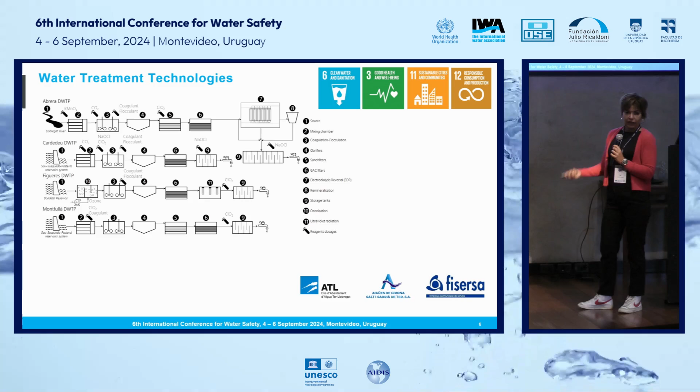So the aim of drinking water treatment plants is to provide this water. This is the conventional treatment train that the drinking water facilities we work with have. The most conventional treatment is a pre-oxidation with ozone or with potassium permanganate that aims to break the organic matter, remove inorganic compounds or pathogens, and improve the treatment efficiency in the subsequent technologies used.

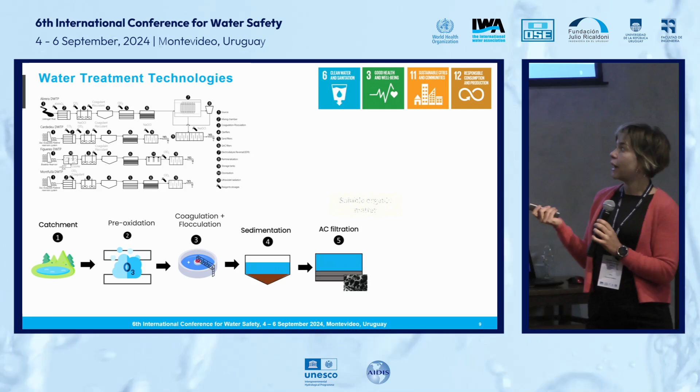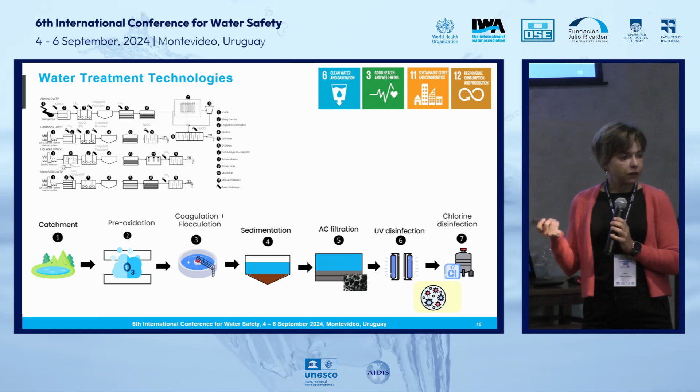Then we usually have a coagulation flocculation plus sedimentation unit that aims to remove colloidal organic matter. This is followed by an activated carbon filtration unit that removes soluble organic matter, and this is followed by final disinfection, which can be with or without ultraviolet radiation.

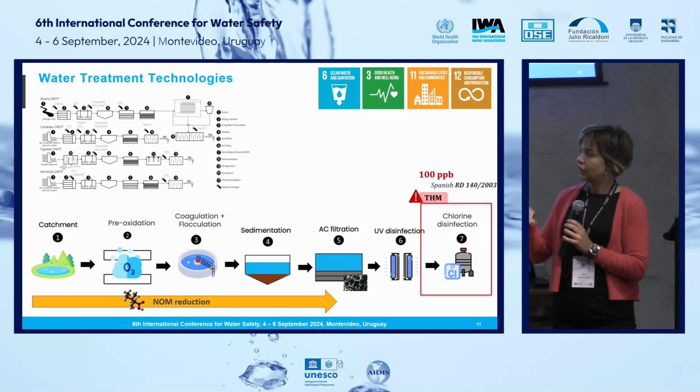But chlorine is mandatory in Spain. And with all this train, the natural organic matter is removed, leading to the formation of trihalomethanes, which are disinfection byproducts legislated under the 100 ppb limit.

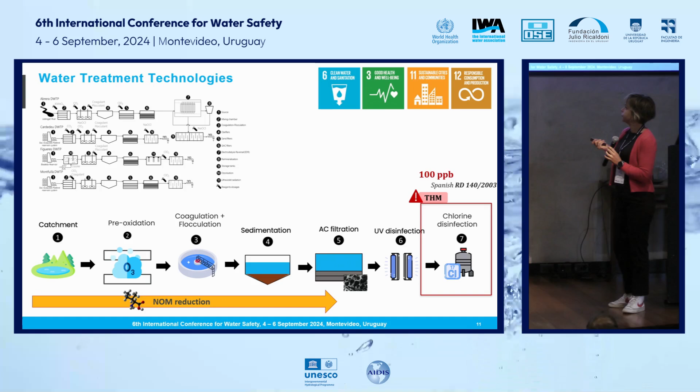So in this context, the objective of the work I'm presenting now is to characterize well the composition of dissolved organic matter and understand its reactivity towards disinfection, to predict the formation of disinfection byproducts in the distribution systems. To do so, we are using size exclusion chromatography coupled with

diode array and organic carbon detectors. But this is a complex methodology, so the outcomes of this technology for analyzing organic matter, we will try to simplify with more bulk analysis methods that we can use online with rapid analysis using visible UV and fluorescence detectors. And all of this, we will try to digitalize to apply in the drinking water facilities.

So this part I'm presenting now is part of the PhD thesis of Meritxell Valentí Quiroga. She is almost ready to defend the PhD this September. And what she's done is develop a method where she can characterize the organic matter based on the fractions according

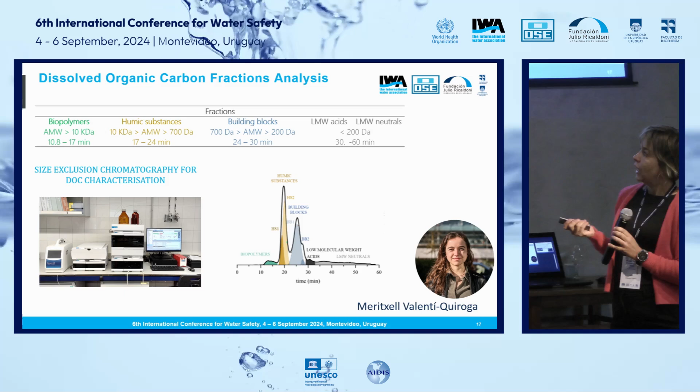to the molecular weight. Using size exclusion chromatography, we can divide the natural organic matter into biopolymers, humic substances, building blocks, and low molecular acids and neutral compounds, which can also be subdivided into fractions. And to do so, we are using two chromatographic columns in series.

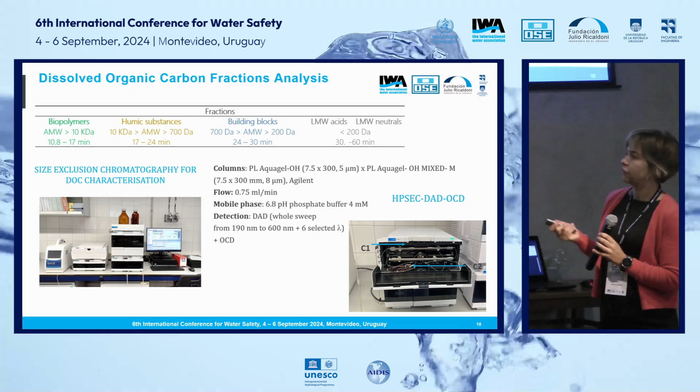And this is the separation method we are using. We have more details if you are interested in the analytical technology. And this work is carried out with three of the facilities I introduced before.

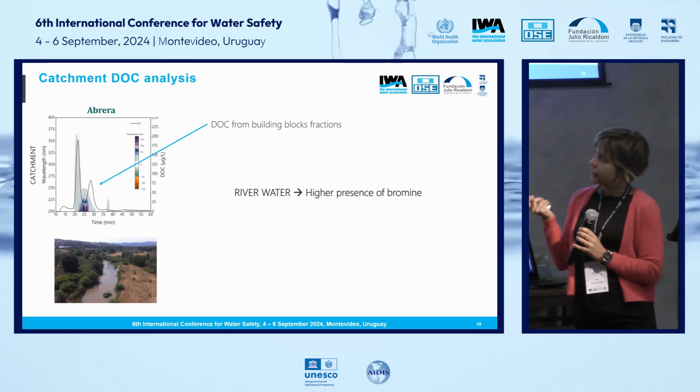Here you see, for instance, in the chromatographic separation, that there is a lot of building blocks in that fraction, in comparison with Cardedeu and Montfullà, which is in Girona, where the distribution of fractions is quite different.

What we did is analyze along the water treatment in the facility. Here you can see from the catchment to coagulation, flocculation, adsorption, and the different technologies applied, how the different fractions are reduced. What we can see, for instance, is that coagulation and flocculation have a lot of reduction in

reservoir sources, while in river sources there is a different behavior, so adsorption produces a higher reduction of other fractions. If we compare the influent to the effluent, we see how this chromatographic separation changes. Here you can see only the chromatograms, but this is something that needs to be observed in detail. So here I only put the influent and effluent for comparison, but here you see the numbers.

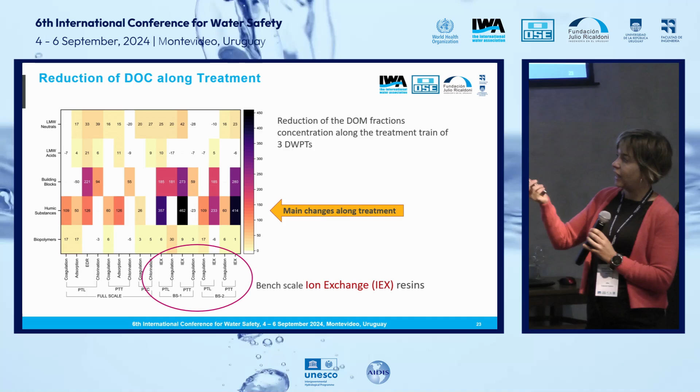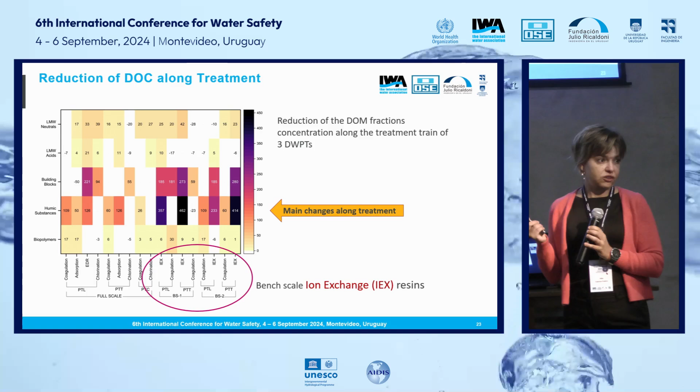made using ion exchange resins. So we compared these reductions in the dissolved organic carbon with the same water's reduction of the formation potentials of the trihalomethanes. To analyze the formation potentials, we did some chlorination with 3 ppm of sodium hypochlorite, analyzing them

with gas chromatography with headspace. And we compared the reductions with the formation potentials. And here I show, for the river water, the Pearson correlations of the reduction in organic matter with the reduction of the formation potentials.

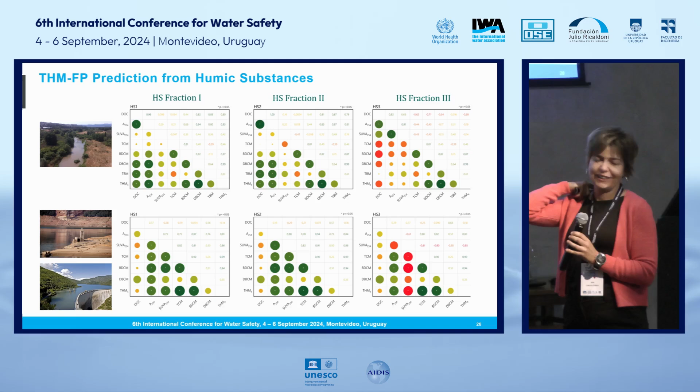Instead, on the contrary, for reservoir waters, the correlations with the brominated species are smaller, meaning that the behavior is very different between them.

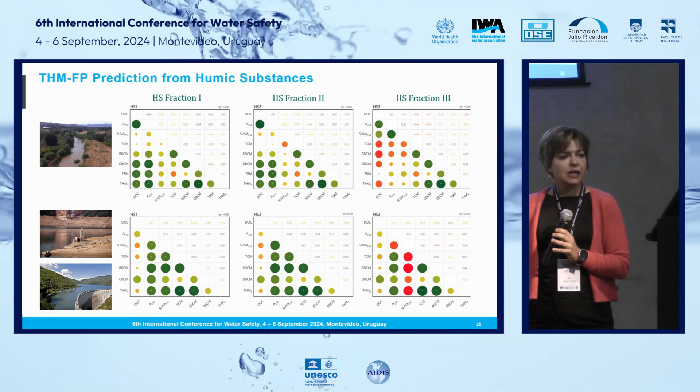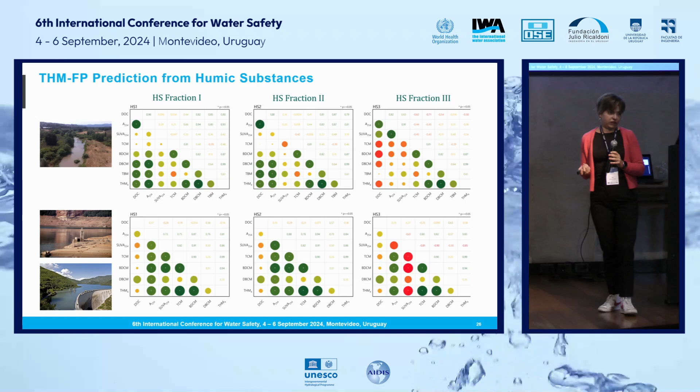This may be complicated to understand here, but we have a couple of publications where we can see it in detail. The idea is that depending on the type of water and the type of organic matter, we can predict what will happen. What we want to do now, and what we are doing now, is translate this information that we obtain with size exclusion chromatography, which is not an easy technique, into simplified bulk analysis.

We have master students now starting their PhD who will work on improving coagulation and flocculation processes, the ones removing more organic matter from water, and also on improving analytical techniques with fluorescent spectroscopy, a very promising technology.

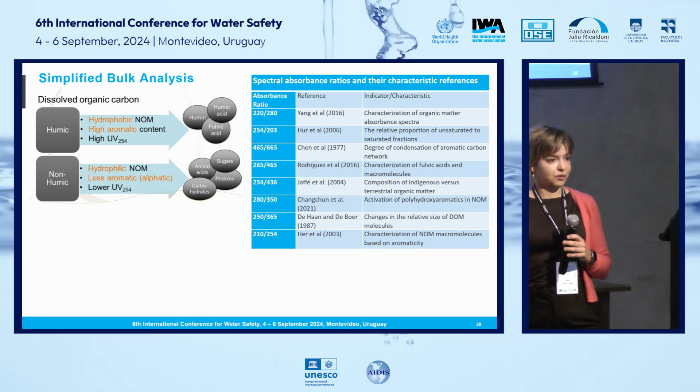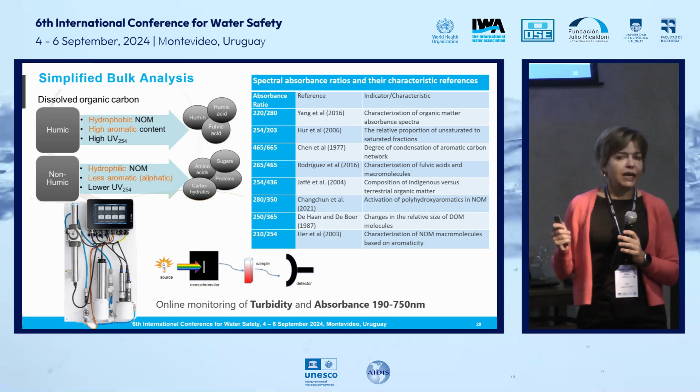The idea is to translate the information from size exclusion chromatography to online analysis. For instance, we have this sensor from s::can that can analyze the whole spectra online, and we already have this in some plants. We will also include a fluorescence sensor, the one we have in the laboratory.

Some organic matter is fluorescent, and some regions of the organic matter will correlate with certain fractions of organic matter. So the idea is to do the same prediction of the formation of disinfection byproducts with this analysis.

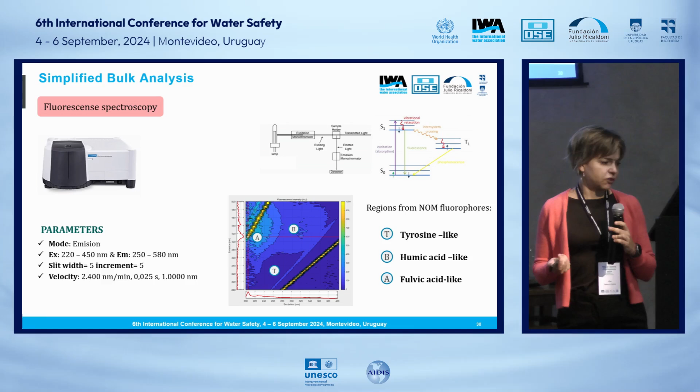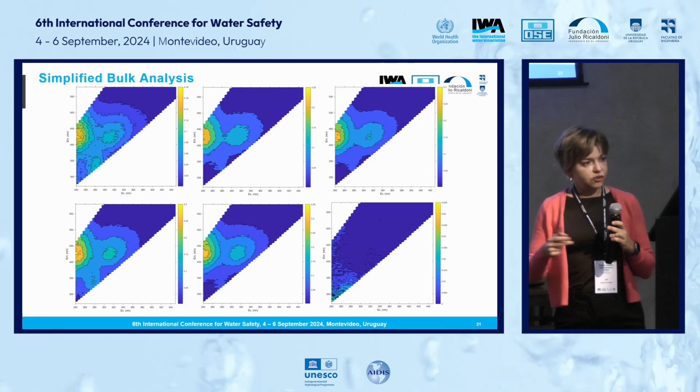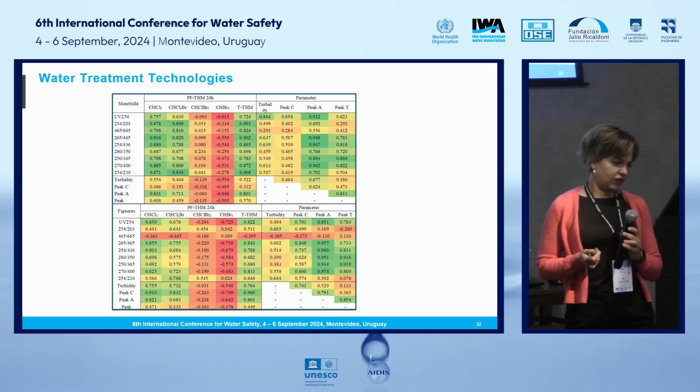We also see with fluorescence how the treatment progresses, how some fractions are reduced, and we are obtaining preliminary results showing correlation between the formation of trihalomethanes and reductions in fluorescence and absorbance with some parameters.

The conclusions of this work are that natural organic matter composition depends on the origin of the water sources, whether from rivers or reservoirs, and the technologies applied in drinking water treatment plants target different fractions of the natural organic matter. We can identify correlations between these fractions, as determined by size exclusion chromatography, and trihalomethane formation potentials, and the information provided online by bulk analysis should correlate with the knowledge provided by size exclusion chromatography.

So this is the first part I wanted to present today. Thank you very much.

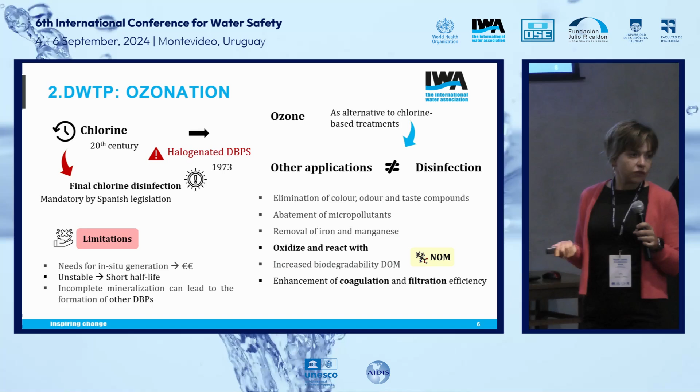It needs to be produced in situ, which is expensive, because it's an unstable molecule with a short life. The incomplete mineralization of organic matter leads to the generation of other disinfection byproducts.

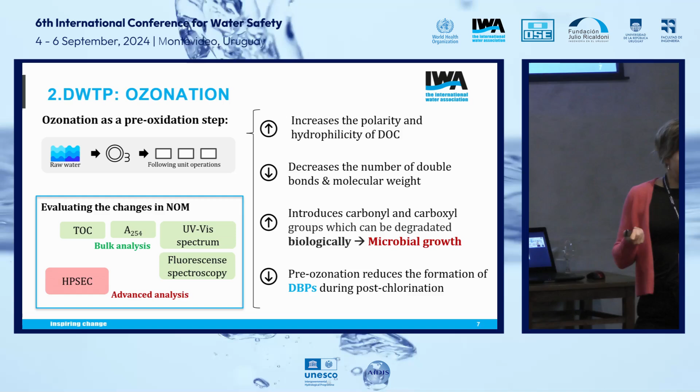Using ozone as a pre-oxidation step increases the polarity and hydrophilicity of dissolved organic carbon and decreases the number of double bonds and the molecular weight. This can increase the biodegradability of organic matter, making it more suitable for microbial regrowth, what we call assimilable organic carbon.

This is something we are studying, because a limitation can be that we make it easier for bacteria to regrow by breaking down organic matter.

As you know from the previous presentation, we can evaluate the changes in organic matter through bulk analysis, including absorbance, fluorescence, and also size exclusion chromatography.

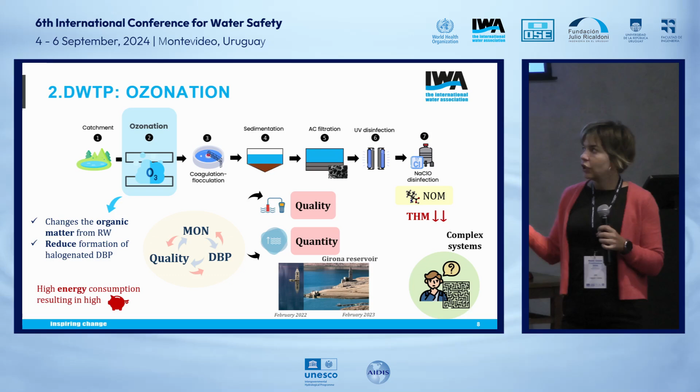Taking into account the changes from global warming, the need for quality and safety in the water provided, and the changes in the quantity available, all of this is a complex system we need to manage. This is why we want to develop an environmental decision support system for water facilities to manage the water supply.

This environmental decision support system comes with several stages. The first is problem analysis, where we analyze the problem of water quality, cost, and energy consumption.

Next, we need to see what data we have to provide the system, whether it's online data or data from the laboratory, and the cognitive problem analysis needed to fit the model and what type of machine learning model we will use. Finally, there's integration and validation of the model.

In the diagnosis level, actions are proposed, and in the supervisor level these proposed actions are controlled and validated.

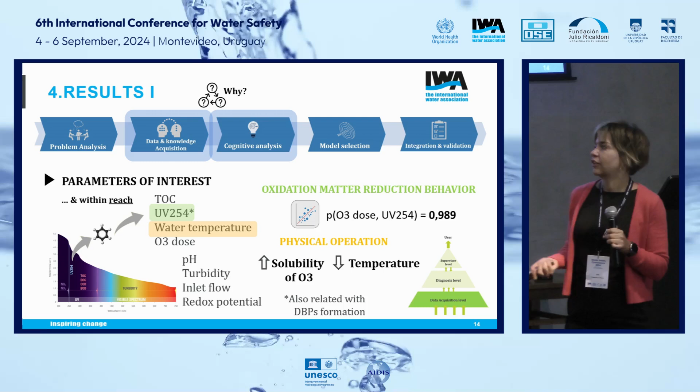The other parameter was temperature, because temperature is related to ozone solubility, and since ozone is a gas, temperature was a critical parameter. These are the two parameters introduced in the data acquisition level.

Secondly, the diagnosis was proceeded with the fuzzy system, which transforms numerical values to linguistic levels and then back again to numerical.

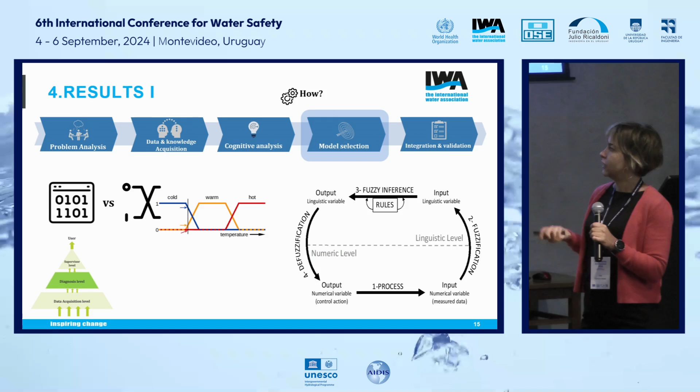To do so, the numbers from temperature and absorbance are transformed and categorized into low, medium, or high values of temperature and absorbance.

When the data is classified, it can again be transformed into the graph we saw before, giving an output of the ozone dose required as a function of these two inputs.

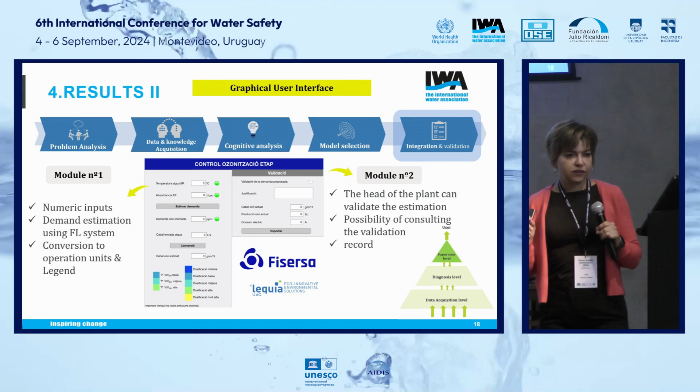This is the interface of the environmental decision support system they are using in the plant. This is the supervision level, and some inputs can be changed according to the user, so the user can interact with the model using this interface. Tomorrow in Hector's presentation, he will show more about this platform, because we are using this in other drinking water treatment plants for other purposes.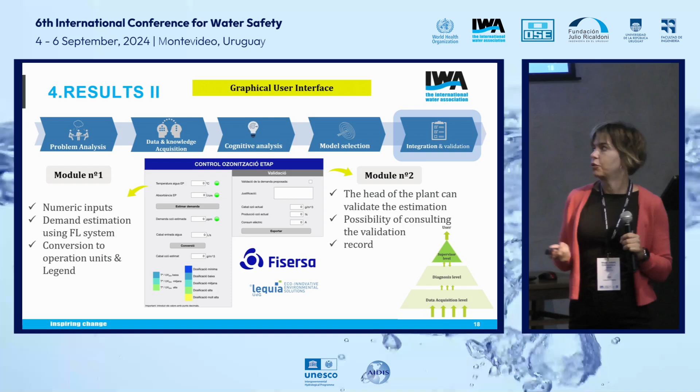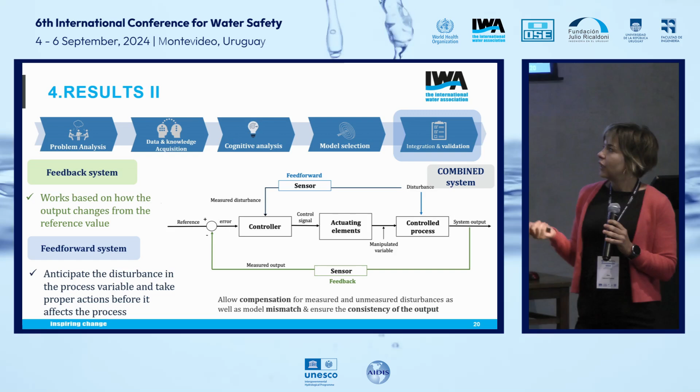We have several ways to improve the system. Now it's working as a feedback system, so the system works according to the outputs. But in order to improve it, we want to update it with a feed-forward system, so the data can be corrected. And also, we want to improve it using the fluorescence data that I mentioned before. This will be another improvement we are working on.

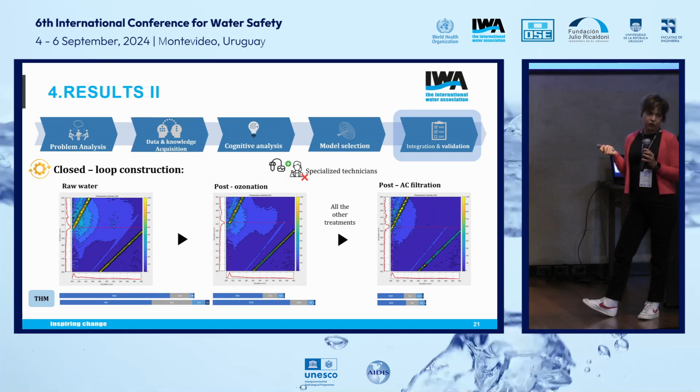As conclusions, we can say that ozone consumption decreased after implementation of the fuzzy-based environmental decision support system, that the model is being validated with online data and will be expanded, that natural organic matter characterization by advanced techniques predicts the trihalomethane formation, and that all this information will be included in the environmental decision support system, combining it in a closed loop.

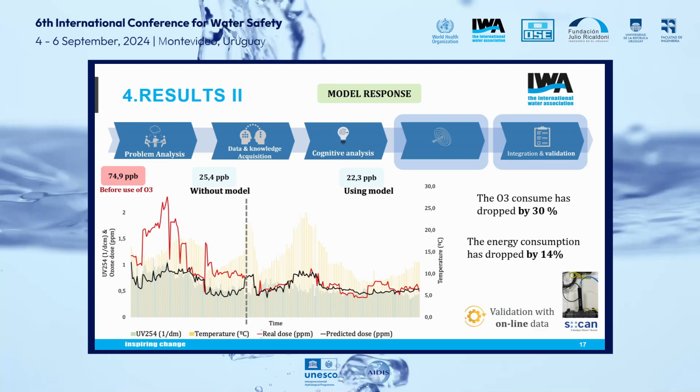I have a question first. If you go back to the slide where you had the dose and the dashed line... that one, yeah. So you had the real dose, and then you have the predicted dose. So this was how you worked until you implemented the decision support, and then you backtrack and check what it should have been. Yeah, yeah.

So how much did the water producer save in ozone dose? Did you say that? So before the line, we ran the model, and what you said, what the model would have said if it was applied before. I'm sorry, so the question was? The question is how much less ozone does the water producer use now when they don't overdose? Yeah, so after the model, the user did what the model said, and before the model, they were doing that amount.

So it says 30% here. Is that an average? An average, yeah. Because in some cases there is much more than 30%, you're right.

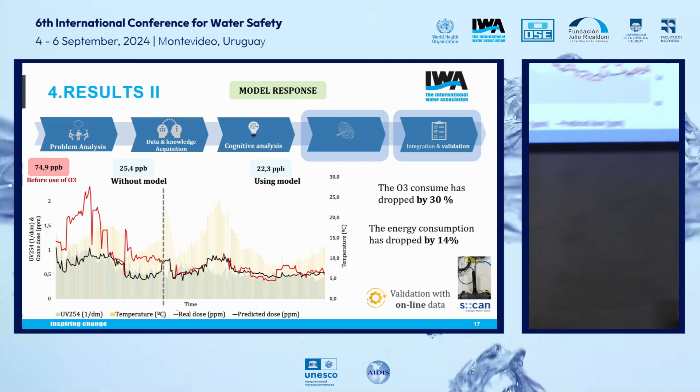So will this also imply that the byproduct formation is also lower? Yes, it goes from 25.4 to 22.3. This is also an average. I see that now, thank you.

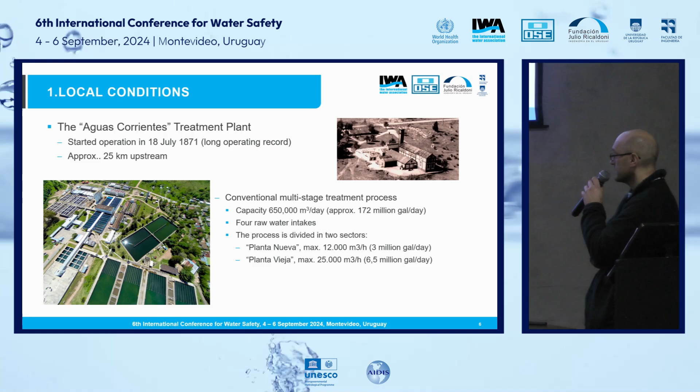This structure has 4 raw water intakes, and the coagulation, flocculation, and sedimentation processes are divided into 2 sectors that we call Planta Nueva, which is about 12,000 cubic meters per hour, and Planta Vieja, that is about 25,000 cubic meters per hour.

So what was happening in 2023? We experienced the third consecutive year of below average rainfall. We also had almost no significant precipitation between October 2022 and August 2023. So back then, the question was: what was the best way to protect the population?

At that time, we had limited available options that were insufficient to meet the demand. We could drill some wells, we could try to borrow water from another system, but bringing the water would imply around 21,000 trucks per day. So those options were available, but just for use in very specific cases.

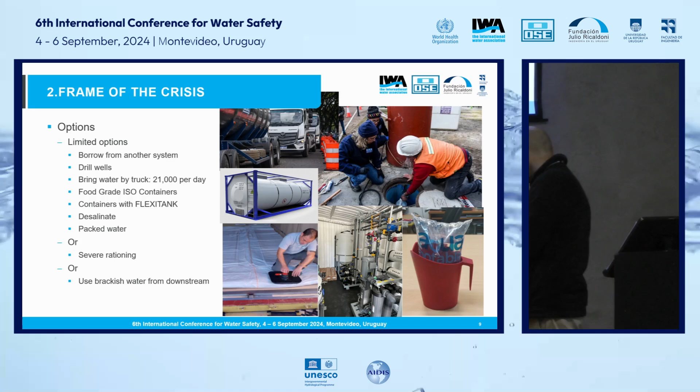In general, we had two options: go to severe rationing of the water supply, or use brackish water from downstream. While we have some experience using brackish water from downstream, because we do it in limited amounts, in this situation we would need much more water.

We would need more pumps, bigger pumps, and also to mitigate the impact of the tidal fluctuations from downstream, we would also need to build a dam to create a reservoir. At that time, around February 2023, the team of the treatment plant was working hard and very diligently to procure and install the pumps. Later on, a dam was built.

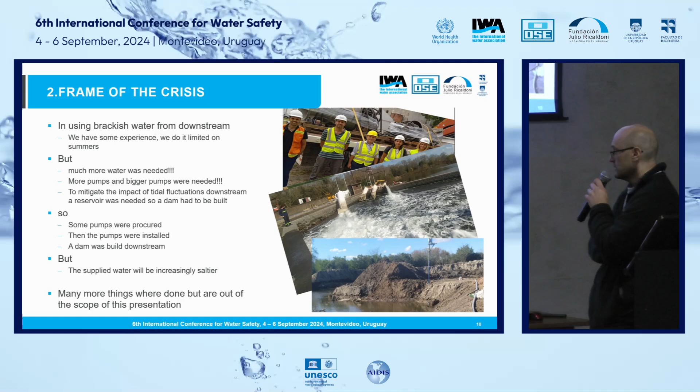But even with all the efforts we made, we knew that the supplied water would be increasingly saltier. Many other things were done, but that's out of the scope of this presentation. So our bottom line: we wanted to ensure that the population was not exposed to levels that pose a risk to health, and also prioritize the provision of clean water for the most vulnerable populations.

So here we will start to discuss things we've done to solve 3 different problems using the same methodology. At stage 1, at the very beginning, we wanted to keep track of the sodium chloride levels of the intake relative to the population. At stage 2, afterwards, we wanted to help the plant operators with operation management, and this tool at stage 3 was a viable tool to communicate with the community.

So, how to track sodium and chloride levels for the population? Well, we need a sampling plan. For a sampling plan, we need to define a sampling strategy, define the frequency, define where, and define the weighting function.

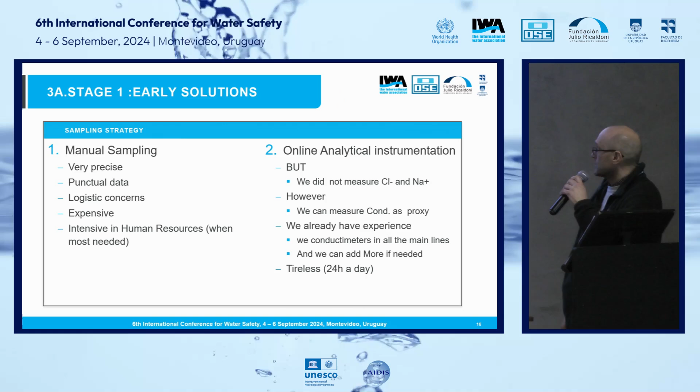On the other side, we have online analytical instrumentation, but the problem is we didn't measure chloride and sodium. However, that was part of the solution: we can measure conductivity as a proxy. It's a highly stable measurement, and we already have some conductimeters installed in the main lines, and we can add more if needed. What's more, it works tirelessly, 24 hours a day.

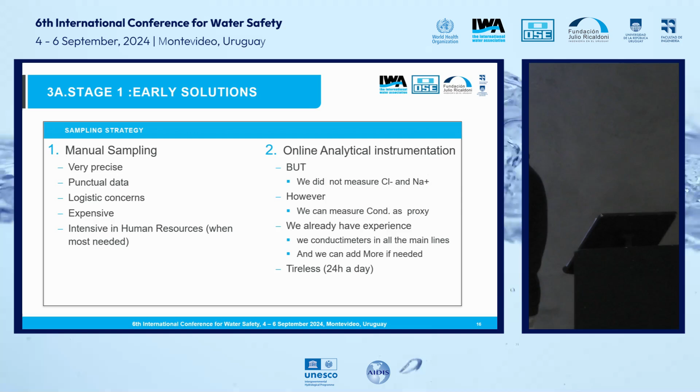So that's how we solved the sampling plan problem. We measure conductivity in the main lines every 30 seconds, average the results over a 24-hour period, and estimate the average levels of sodium and chloride to generate a report every day so the decision maker can do their work.

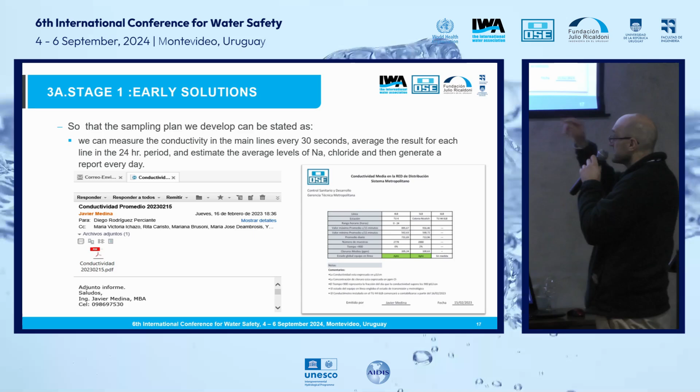In the pictures, I'm showing the first report we made, on the 16th of February 2023. At that time, we extracted the data from the SCADA system and processed it in a spreadsheet. Later on, we improved the model and automated it.

Here, it's valuable to give an insight into the structure of our data collection and information system. On the left, we have an actual data acquisition station close to one of the main lines. Then I have a scheme of the communication structure. We use private and public networks and communication protocols to send the data to the SCADA. From the SCADA, we have databases that we use to produce the reports.

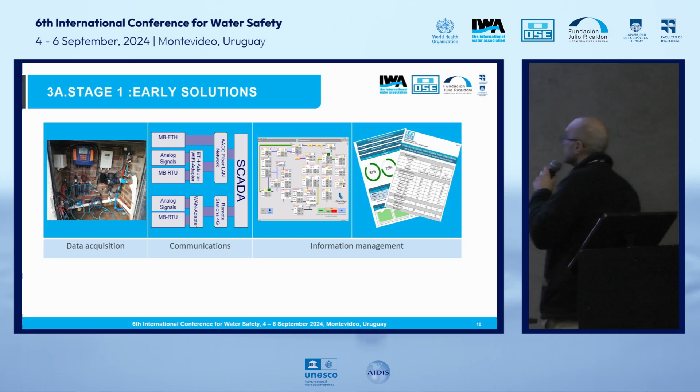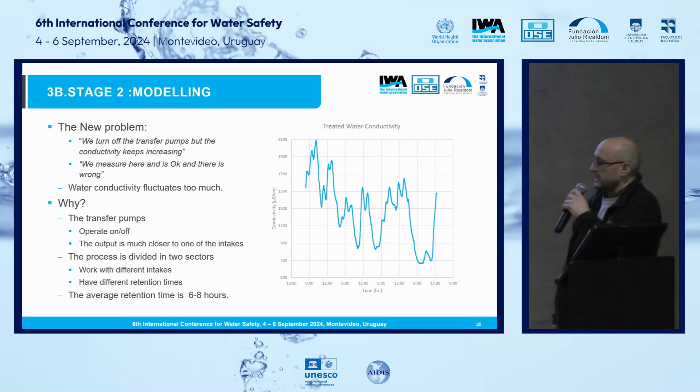So at stage 2, there was a new problem to solve. At that time, the transfer pump started operating, but the sodium chloride levels were changing too much, and it was difficult for the plant operators to adhere to the operational guidelines. Aside from the lack of water, there were several process-related factors contributing to the issue. First, the transfer pump operates on and off, and the output of the pump was much closer to one of the intakes of the treatment plant.

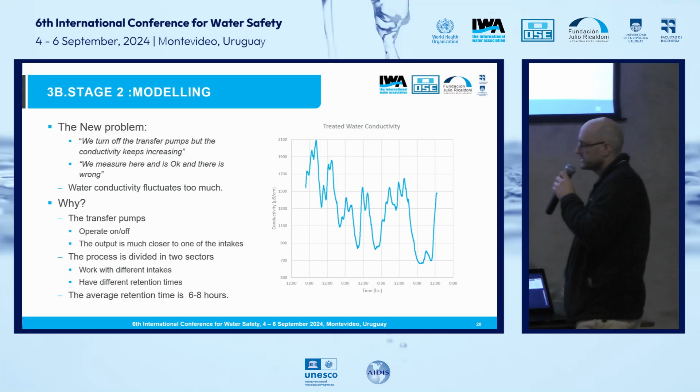Also, as the process is divided into 2 sectors, we have different retention times for the water within the treatment plant. We have to take into account that the retention time in the plant is about 6 to 8 hours. So the question now is how to get more stable sodium and chloride levels.

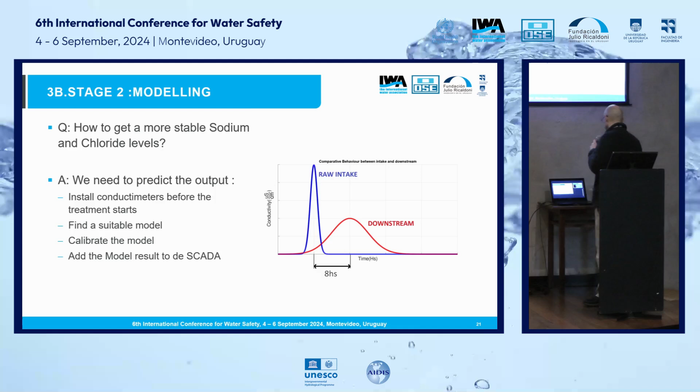We need to find a way to predict the output. So we had to install some conductimeters, find a suitable model, calibrate the model, and add the model to the SCADA. And that's what we did: we installed conductimeters with communication equipment, made a model, made the calibration, and then integrated the output into the SCADA.

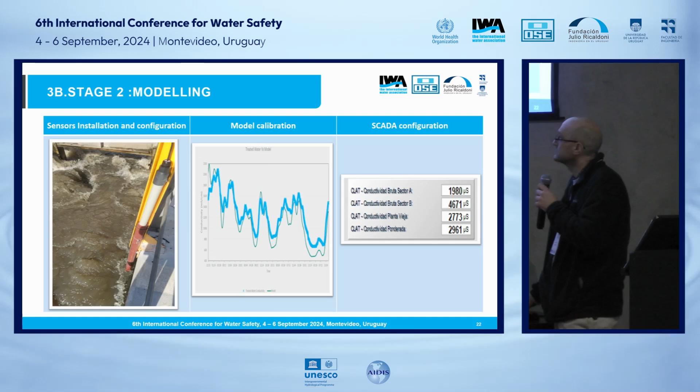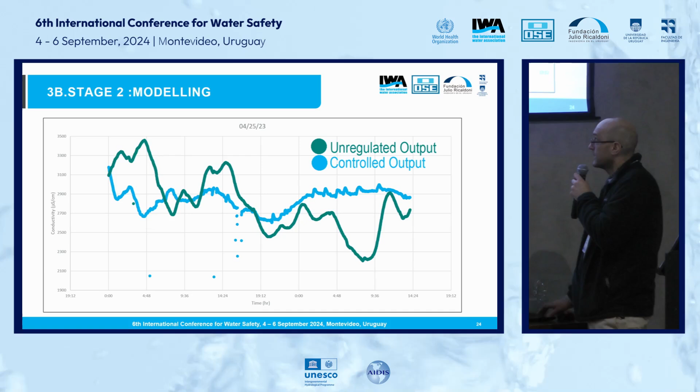That's an actual picture of the SCADA for staff access. This is the conductivity profile of the output, one month apart, one before and one after. But because it's difficult to make a comparison as the conductivity has changed, we superimposed the curves. This is not proof of the absolute value nor the solution of the improvement, but I think it helped.

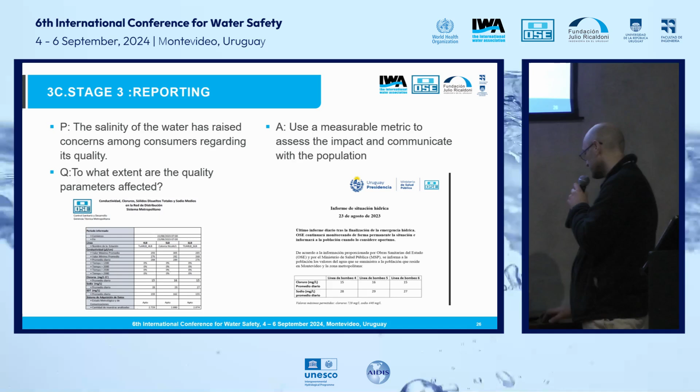As the proverb says, never two without three, and at that moment we were approaching the most challenging phase of the crisis, and the humans were highly concerned about the water quality. At that time, some clever individuals seized our report and used this information to quantify the problem, providing a measure and metric to inform the population about the situation. This information was published on the webpage of the presidency, and then you would see the information in all the TV news, radio, newspapers, etc.

So as a conclusion: during the crisis, the control strategy has to adapt to the new circumstances. Remote sensing and data acquisition proved an excellent tool, not only to monitor but to help the production process, and it also provided the basic framework to communicate with the population.

So this is a list of things we are doing right now related to the example we just discussed. We are trying to incorporate learning lessons into the water safety plan and further improve strategies to distribute potable water. We are also working to improve the information management system, put in production a better warehousing model to utilize different database sources, and from the online monitoring system, implement an upstream monitoring station, improve the treatment plant instrumentation, and improve the measuring system.

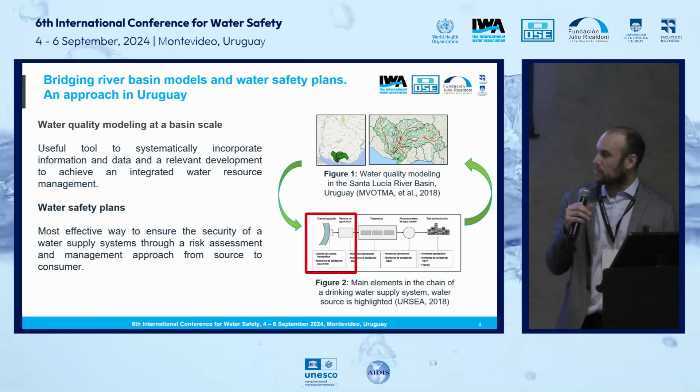When we look at basin scale in our country, the problems in water quality are typically more related to nutrient loads and eutrophication of water bodies, which also generates problems identified in water safety plans. For example, some of the risks assessed in water safety plans are related to discharges from agricultural activities, runoff from agriculture, excess nutrients delivered from soil to water, and events of algal blooms that cause problems in drinking water production.

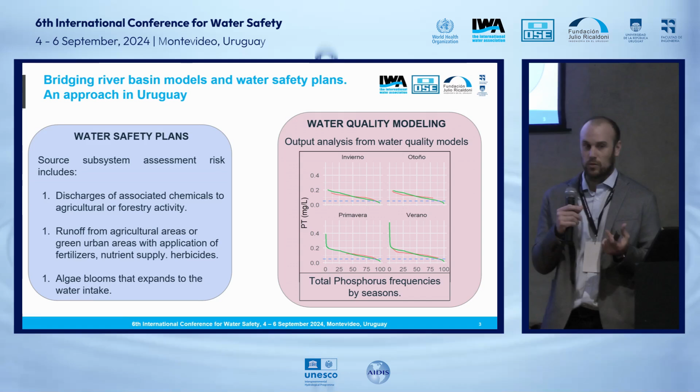So on the right side, we see some examples of outputs from the water quality models. In this case, we show an example of frequencies of total phosphorus that we see in different seasons. When we look at that, we can associate some of the decisions we take in water treatment and drinking water production.

This work basically goes in this direction, and I would be happy to discuss outside. The general conclusions are that there are two tools that can be very well linked, and potentially they can help make both approaches more efficient.

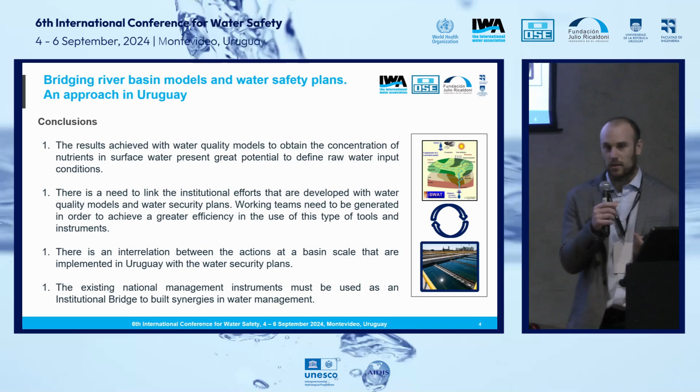We also see that typically these types of developments are done by different institutions, so there is an opportunity to work together with teams from different institutions, and working teams need to be created. There is also a need to create integrated management tools and instruments for the water systems. So it's an opportunity to work on that together across the different institutions.

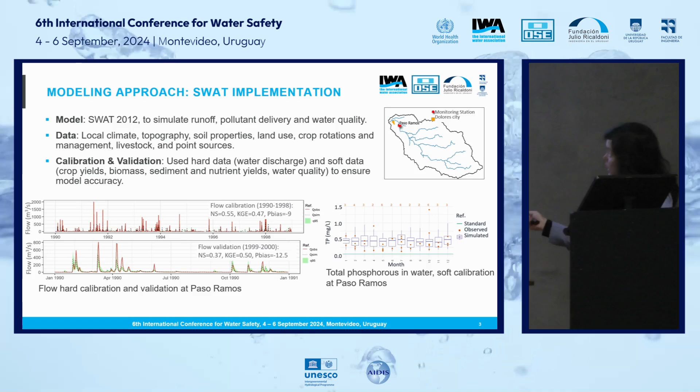Our findings reveal that nutrient loads consistently exceed target thresholds across all flow conditions, where cropland has a big impact on high to moist flows, and livestock and point sources are important in mid to low flows. These results improve our understanding of the complex relationship between land use, hydrological dynamics, and water quality in the basin.

This study offers a valuable tool for scenario modeling and supports the planning and management of natural resources in the San Salvador River. The SWAT model we have implemented is freely available and can be used for further research and for developing strategies aimed at improving water quality and promoting sustainable land use management in similar agricultural catchments.

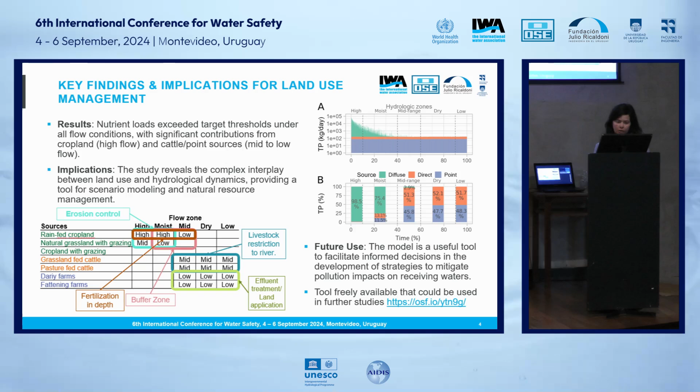I invite you to visit the poster after lunch. We will be delighted to discuss our work in more detail and explore potential collaborations. Thank you.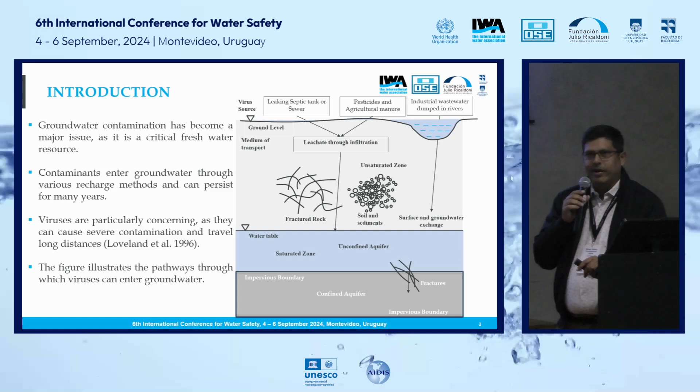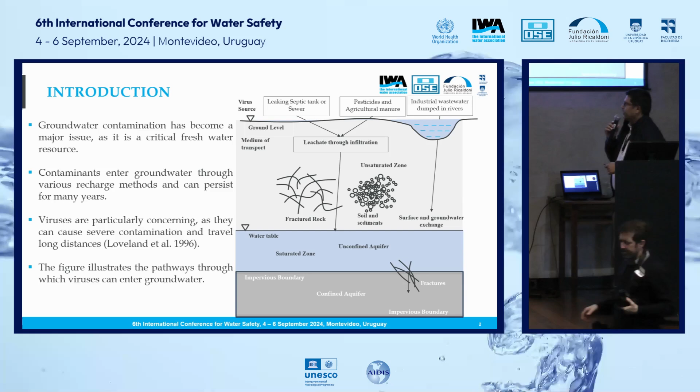I'm not going to say much about groundwater contamination by virus. There's a lot of research already done, and many people have reported that groundwater in many parts has been contaminated by viruses. This is some data showing that almost 8% of disease is caused by the consumption of groundwater contaminated by virus.

When the virus comes, it actually has two parts: the protein coating and the DNA/RNA, both required for survival of the virus. And they are highly sensitive to the environment or the temperature they have.

We took that idea to figure out how to manage these viruses. As I said, these viruses are very sensitive to temperature, pH value, and solution chemistry. So by changing those things - temperature or pH value in the medium - the virus can be eliminated from the aquifer.

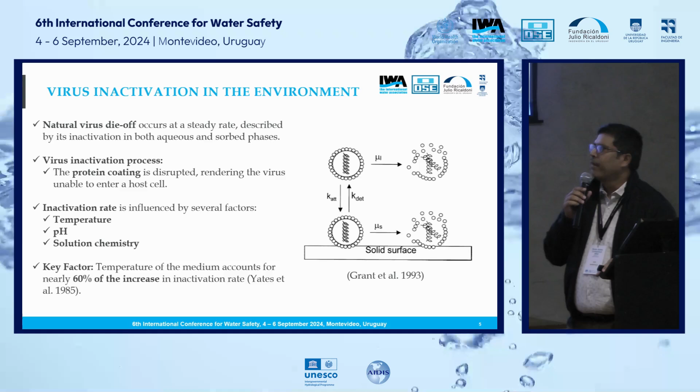In this case, I used temperature. Suppose you can change the temperature of the medium, then you can actually decontaminate the aquifer medium. This is based on some research already done - I'm not exactly working on how virus is sensitive to temperature itself.

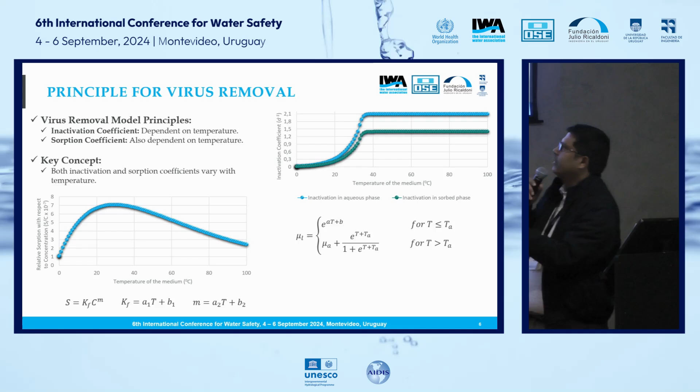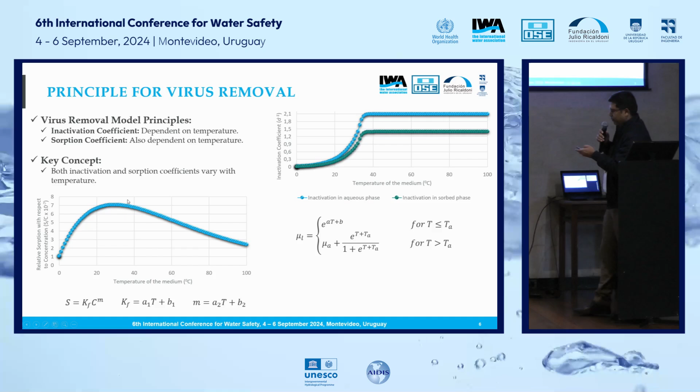So with the increase in temperature, what happens? I can model this using the advection-diffusion equation, but there's an inactivation term. I've shown here how the inactivation term changes with temperature, and similarly sorption will also change with temperature. So these two parameters we can change by changing the temperature of the medium.

So now the question is what decisions we have to take - how to increase the temperature of the medium. What we did was inject hot water into the aquifer through an injection well, and the aquifer medium temperature can be increased temporarily. If you stop it, the aquifer temperature will come back to the original level.

So what decisions need to be taken? The location of the hot water injection well, the amount of water to be injected into the aquifer, and the duration of injection - how long you will do that. For this, we developed a model using ModFlow, RT3D, and MT3DMS. This is the flow chart of the model.

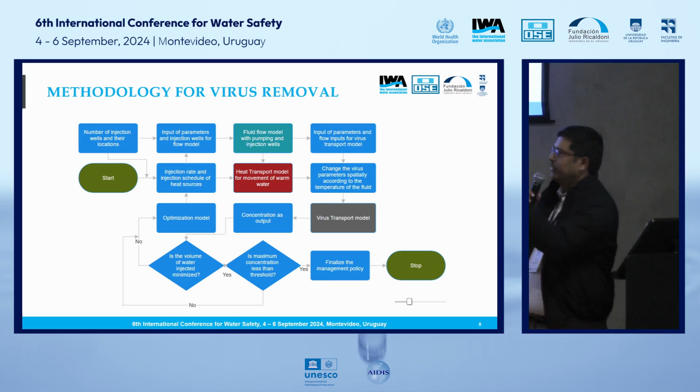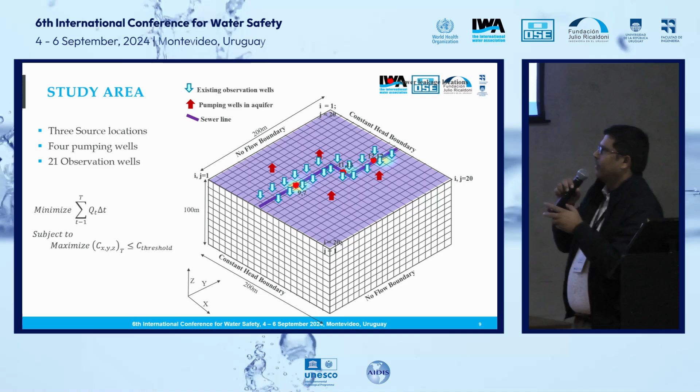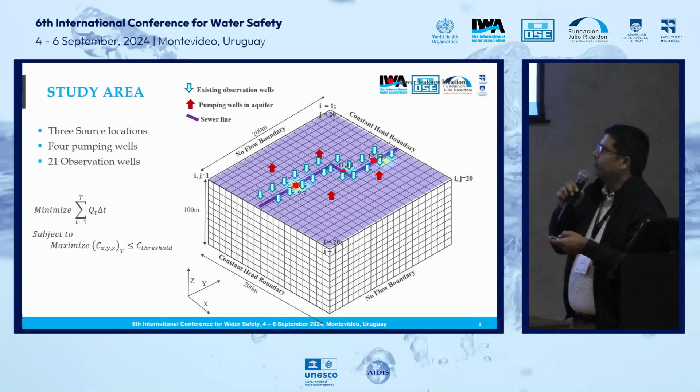Finally, using that, this is the hypothetical problem we considered. We've shown the injection well, the observation well, and the contaminated source, obtained through an inverse model. This is basically the idea of how we can select the injection well - since I don't have much time to explain, we can select the optimal location of the injection well through this method.

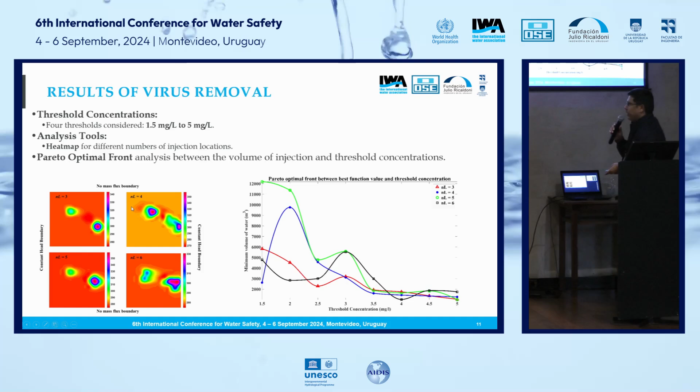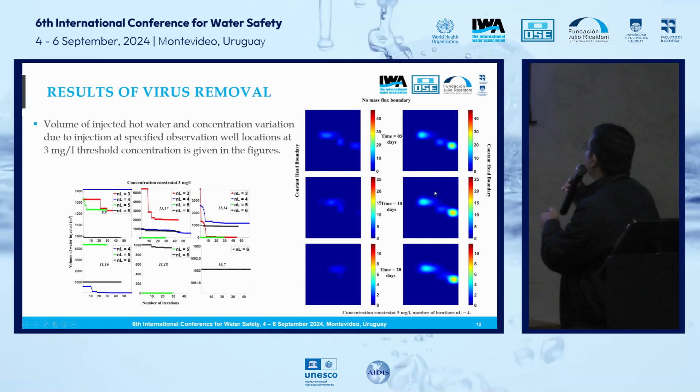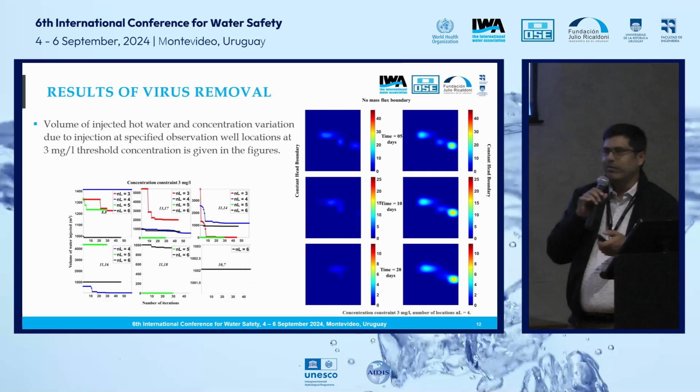This is the result of the simulation optimization model - here we've shown the heat map, and temperature increases into the aquifer. This shows the Pareto optimal front for different levels of threshold concentration. This particular diagram shows that if you do nothing, this is how the virus spreads into the aquifer. With these measures, we can reduce the concentration of virus, and given more time, the entire virus can be eliminated from the aquifer.

So these are some of the results - since we don't have much time, here is the conclusion. We have developed a methodology for taking decisions to inject hot water into the aquifer, which will increase the temperature, and finally we can eliminate the virus. Thank you very much.